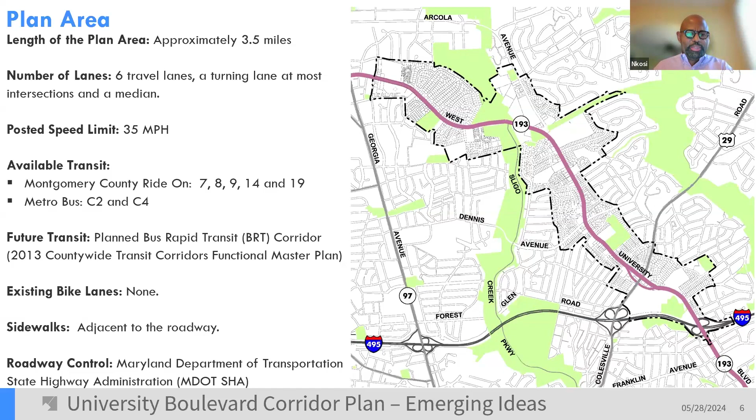A bit on demographics: we have roughly 3,400 residential units within the plan area, within the dark dotted lines running along University Boulevard, MD 193. It's a mix of residents within the plan area from an ethnic makeup perspective, and we have a variety of languages spoken, including Spanish and Chinese.

So as I noted, roughly 3,400 plus or minus units. We have a range of detached residential as well as townhouses built in the 1980s, early 90s, and some early 2000s. Most of the multifamily housing was built in the late 1960s, clustered at the intersection of Arcola and University Boulevard, including Arcola Towers, the Warwick, and University Towers, which are residential condos.

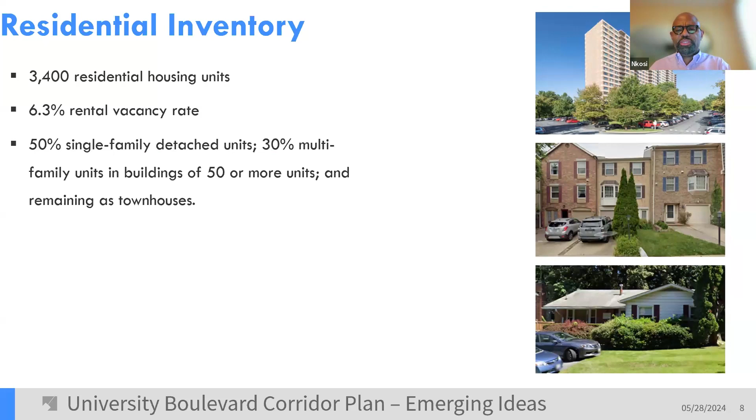Briefly on land use, existing uses. So just to orient you in terms of the colors you see on the screen, those in blue include public institutions or religious institutions.

We have Blair High School, at the intersection of 29 and University. We also have Northwood High within the plan area boundary. We have a variety of religious institutions: St. Bernadette near Blair, Good Shepherd along this portion of University, Luther Rice right across the street, and a few synagogues as well within the plan area. So we have a variety of public as well as religious institutions.

The red is primarily commercial businesses, located within the Four Corners area, as well as in the Kemp Mill shopping area, and along Amherst. We also have, as I noted earlier, multifamily at the intersection of Arcola and University.

The green is primarily parks or open space. We have Sligo Creek, a portion of that running through the plan area, as well as existing parks such as Wheaton Forest and North Four Corners local park shown in green. Everything else in the lighter yellow color is detached residential, or in some cases residential townhouses.

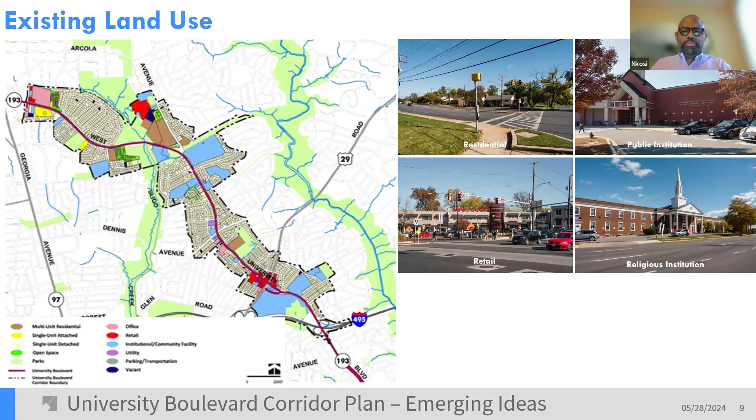Zoning is a key aspect to some of the work we'll be doing on this plan. Much of the area is within a residential zone, either R60, that's 6,000 square foot minimum lot size, or R90, which is 9,000 square foot.

In 2014, the county council did a comprehensive update of the county zoning ordinance and implemented new zoning categories within the Four Corners area. Those properties are now within a commercial residential town zone that permits both residential and non-residential uses.

Likewise, the neighborhood retail zone, shown here in red, is for Kemp Mill. And in blue, here are two planned development zones. Those are prior zones from the zoning ordinance that predated the council changes in 2014, an older zone category.

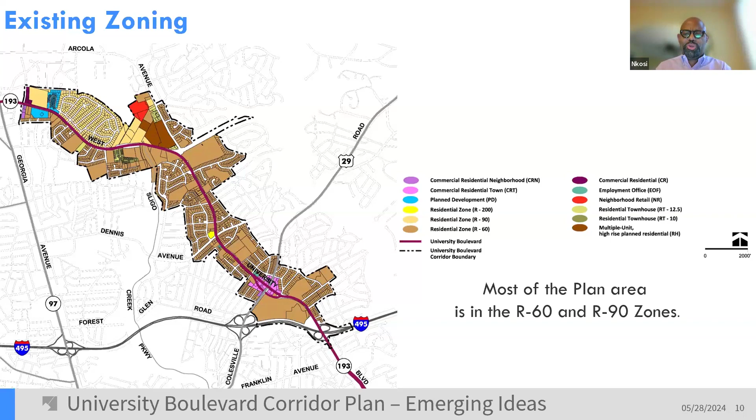As we move forward on this work for this plan, we'll be updating some of the planned development zones as well as the residential townhouse zones. Those are the two zoning categories that we cannot reestablish when we do a new plan. Next slide.

A bit of information regarding market conditions in the residential market. By and large, for a rental unit in this area, it's roughly $1,700. For sale, it's a little bit less than $600,000, which is comparative to other parts of Montgomery County. It's not as high as some areas such as North Bethesda or Silver Spring, but it's still relatively affordable.

Next slide. A brief note on some of the market analysis done as part of this planning effort, both internally and with additional consultant help that we received so far.

Much of the area is predominantly residential. We do have two distinct areas nearby, downtown Silver Spring and Wheaton, that sort of bookend both areas. There's a significant presence of institutional uses with a variety of religious institutions, followed by retail in terms of the amount of space. There's also some forecast potential for more residential development, which could bring a different sort of retail presence within the corridor plan area.

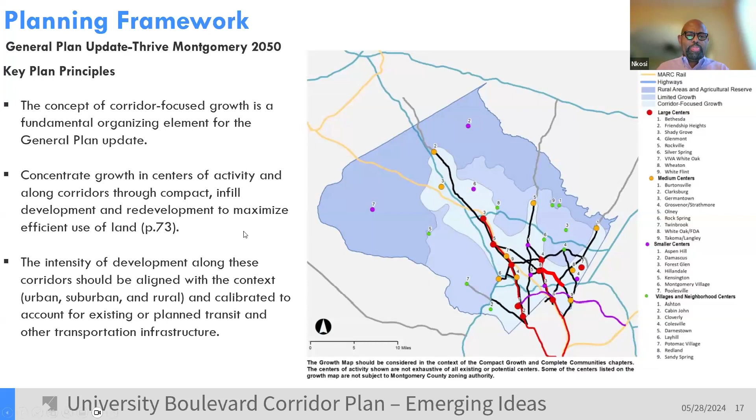In addition to the general plan, the council in 2021 requested the planning board to examine the attainable housing initiative. This came out of a zoning text amendment introduced by Council Member Jawando that proposed changes to single family zones, especially the R60 zone, and I believe the R90 as well, in terms of adding additional uses to those zones. Before acting, the council wanted more understanding of what's in some cases called missing middle—different unit types besides townhouse or multifamily. These are older typologies of residential development that we haven't seen in multiple decades in Montgomery County or other parts of this region.

And those are like duplexes, triplexes, sort of smaller apartment buildings. So my colleague Lisa Govoni and others have been working with the planning board.

They've had multiple work sessions, and they will be sending out their recommendations to the council probably later this summer regarding this initiative. This will have a countywide focus, not only for University Boulevard, but all parts of Montgomery County, depending on what decisions at the end of the day the council makes on the attainable housing initiative.

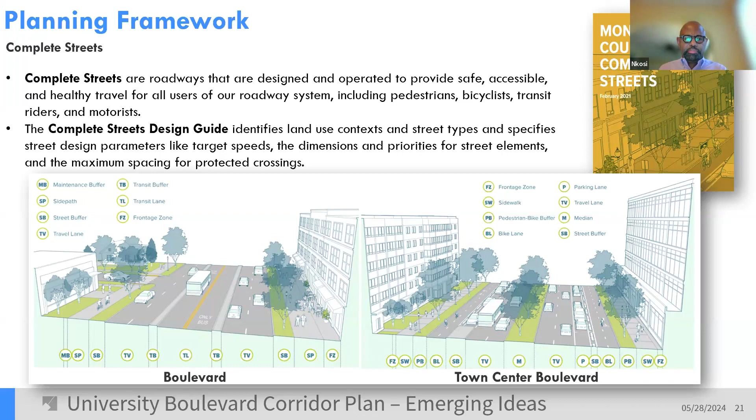As I mentioned earlier, the countywide transit corridors functional plan dates back a little while from 2013, but it provides 10 distinct bus rapid transit corridors countywide. What's shown here is University Boulevard between Takoma-Langley Transit Center to Wheaton. The area in red is calling for dedicated space for bus rapid transit, as well as the area at Four Corners in yellow, considering mixed traffic. So there's a lot going on in Four Corners.

It also identified a variety of BRT stops—these little circles here. You have Amherst, Inwood, or Arcola, some of the stops that are called for in the transit corridors plan. As part of this effort, we're examining those recommendations, and they will be either adjusted or confirmed as part of our work on this corridor plan.

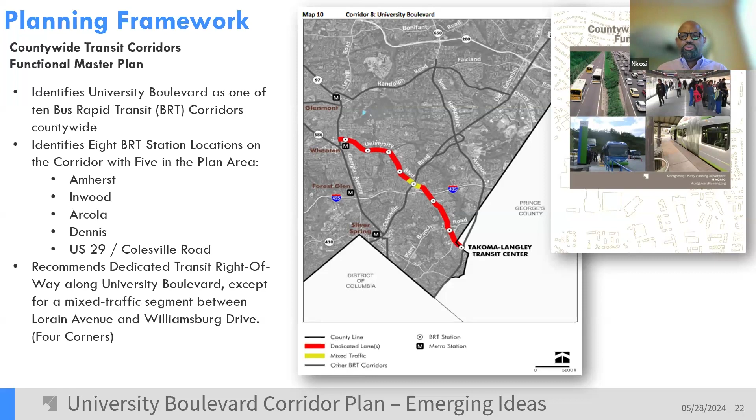Another bigger countywide functional plan, the Bicycle Master Plan, is looking at a variety of new typologies within all major streets, including University Boulevard, where it's recommending a side path as well as a recommendation for a breezeway—a higher quality biking infrastructure.

But as part of this planning effort for University Boulevard that we're undertaking, we're going to be re-examining this recommendation coming out from the Bicycle Master Plan, and we'll be making potential adjustments to it regarding the limitations on the right of way that we are working within.

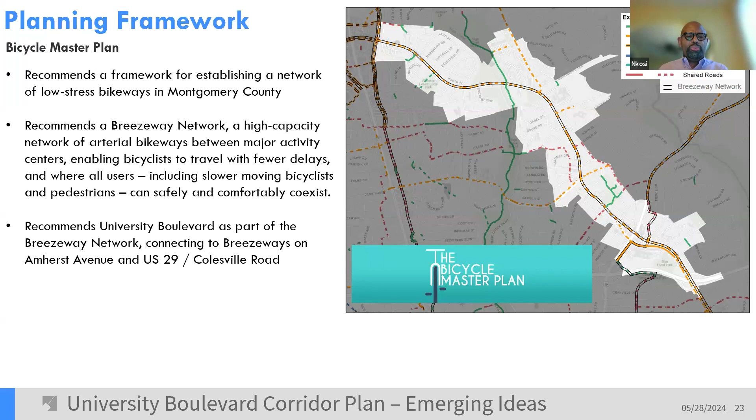Okay, so this is part of the presentation where I'll do a pause for any framework Q&A questions. Zubin, I will knock on your door to see if you have any questions coming in as they pertain to some of the overarching framework plans, etc. That is part of the presentation.

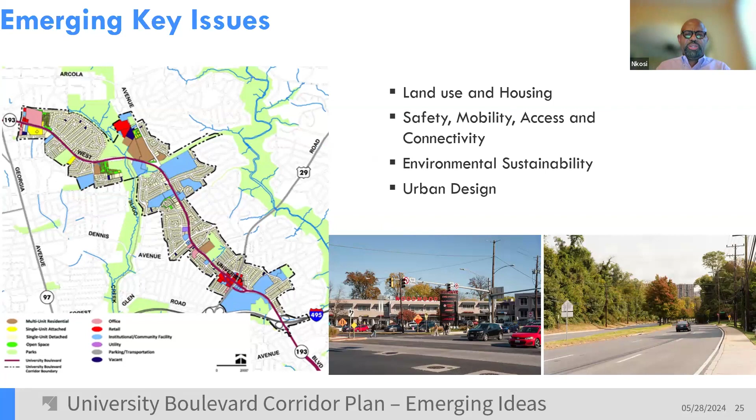So what's in front of you on the screen is a plan concept. A plan concept is one of the sort of initial tools we create once we start thinking about an area and how things could be in the future.

So briefly to walk you through what's shown on the screen, the dark circles are the BRT stops coming out from the functional plan, Amherst, Inwood, etc. Those shown in red are primarily potential mixed-use areas: Four Corners, Kemp Mill Shopping Center, the area around WTOP, as well as Amherst.

We also highlighted the Housing Opportunities Commission, or HOC. They own three properties within the plan area, including Arcola Towers, and they also own Permanda Court, which is right next door to Wheaton Forest Local Park.

And we also highlighted some of the churches here, such as St. Bernadette, that's located right here, as well as Northwood Presbyterian. And then in blue are some of the existing multifamily developments that are clustered at Arcola.

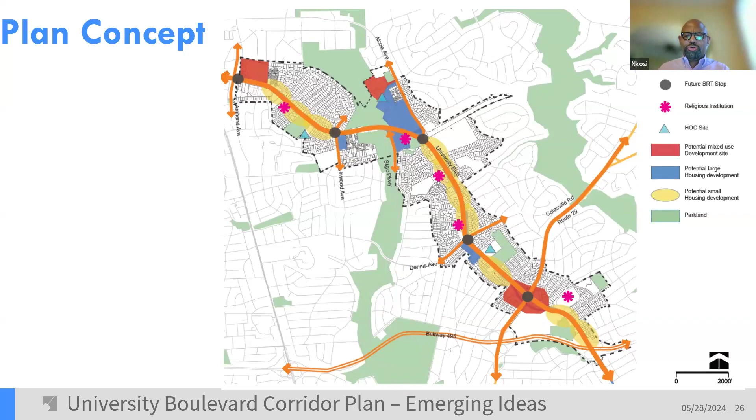And then along University Boulevard, we've highlighted in yellow potential new housing typologies. That's something we're going to be digging into more as we continue to work on this plan. And then obviously green are the existing parks or parkland such as Sligo Creek. Next slide.

This gives some more words and context to what I've just noted in terms of promoting more mixed uses from existing single-use commercial centers at 29 and University, Arcola regarding Kemp Mill, as well as in the WTOP Amherst area, thinking about the BRT stops and what opportunities there are in terms of potential changes over time.

Promoting new infill development at some of the religious institutional properties, building off that zoning text amendment approved by the council, thinking of different ways that potential changes could occur.

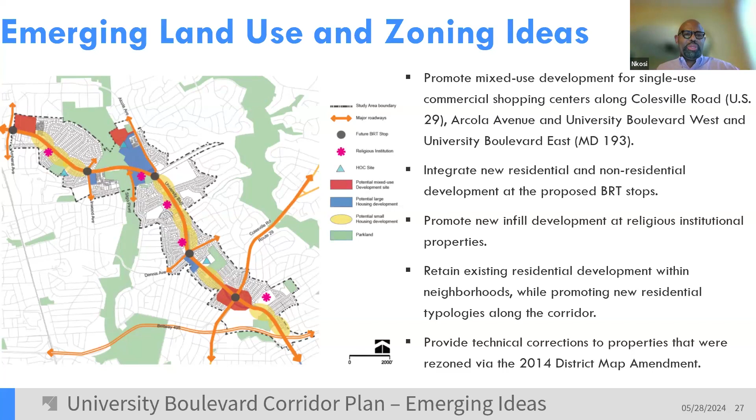We have an example showing you what we mean by infill development, and then retaining residential while promoting new potential typologies along the corridor, and then making some technical corrections based on the work from the district map amendment from 2014. Those are primarily properties where we cannot reestablish the existing zones again. Next slide.

Urban design is a key aspect that links both land use and placemaking together. Today, most of the plans we've done, prior approvals from the 80s, early 90s, or even from 2001, like the Kemp Mill plan, did not really address urban design. But in terms of that final experience we all would see once a property redevelops, from the architecture, to walking around safely, to the creative aspect of design or creative features, those are some of the things that really would be integrated regarding urban design.

So as we move forward on the plan development, plan recommendations later this summer, you'll have an urban design section with additional details and recommendations to build upon the land use and zoning recommendations, as well as highlighting some creative things that could fall within the placemaking category, where over time you could have new design, unique features that enhance the community even more. Next slide.

Some of the emerging land use and zoning ideas include promoting mixed use development, and that's primarily in the Four Corners area.

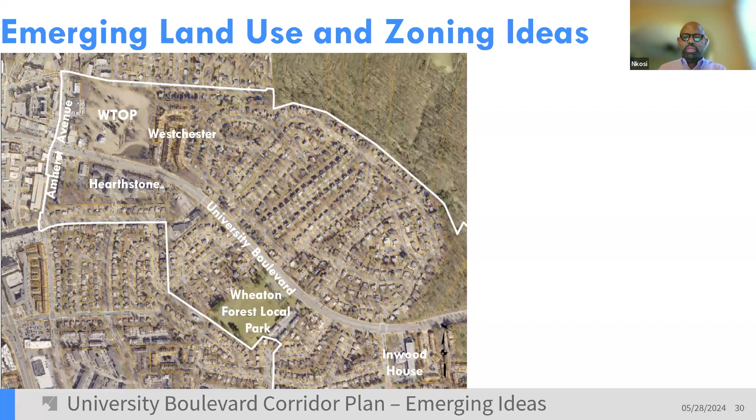This begins to show a conceptual urban design framework of what could potentially happen on the WTOP site. We know from conversations with WTOP that they don't have any current plans to do anything, but we're thinking long term, 15 years, 10 years from today - if those towers are no longer in use, what could potentially happen there?

On this site, seen in red, there are some new potential roadway connections, getting you more porosity within the property. There is the historic resource, the existing white building that's within the county's master plan for historic resources - that's untouchable. That's more than an acre of area set aside because it's historically designated.

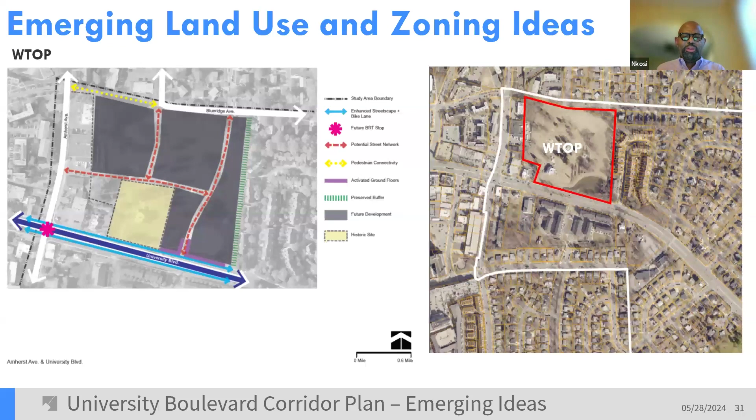But then the gray area is showing where the potential development could occur. We're also thinking of having some amount of open space on this property, such as a neighborhood green or some other public type amenity that would be consequential if this property eventually redevelops into the future. Next slide.

This is an approved preliminary plan. Approved preliminary plans are one of the development review functions that we have as a department. It's one of the earlier stages of review that the board would act upon once this plan is submitted and goes through the review process.

This is Har Tzeon Agudath Achim synagogue right near Reedie, not too far from WTOP. A couple years ago, in '22, they received a preliminary plan approval for a 90-unit senior building, shown on the lower right portion of this slide, as well as a 22,000 square foot synagogue.

This is an example of an infill, meaning we have development that surrounds it today. But you have one use, a synagogue today, that could potentially get redeveloped, and you add in additional uses. In this case, it will be the senior building, and then the synagogue will be the lower portion.

So this is the preliminary plan that shows lot one would be the senior building, and the second lot would be the synagogue. This is an example of what we think could happen over time for other religious properties along the corridor, in terms of adding more infill, either residential or repositioning their properties.

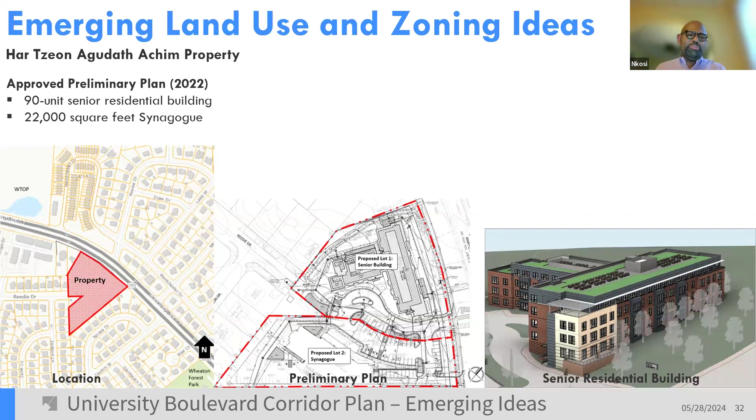Likewise, on the south portion of University Boulevard, this is the Northwood Presbyterian Church property. We've been in conversations with them - that property is up for sale, and we know they're thinking of different alternatives besides the religious use that's there today. And on the next slide,

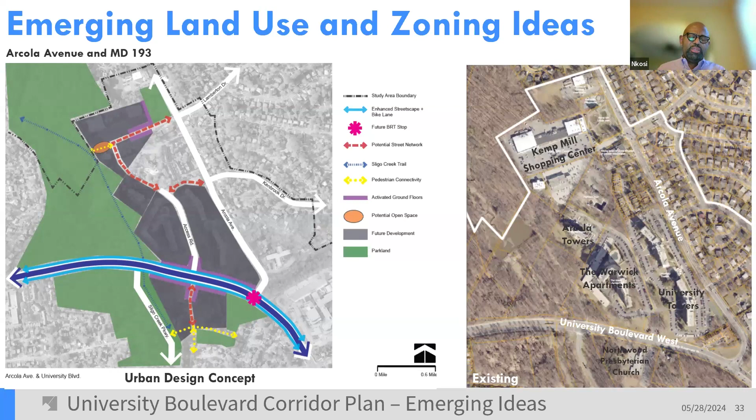you will see a more focused concept regarding Northwood Presbyterian. The area in gray is the big bubble that says future development. We don't know what can go there, but potentially it could be either multifamily in that 4 to 5, 6-story range, townhouses, duplexes, small apartment buildings - those types of things we're thinking about.

You also see some potential connections. This area has some environmentally sensitive areas that you want to protect and retain. You're seeing existing trails coming out from the Breewood Neighborhood Park here that will begin to take you potentially to Sligo Creek. Today we have more of a people's choice path - maybe in the future that could get a bit more formalized. So those are some of the connections we're thinking about for Northwood Presbyterian.

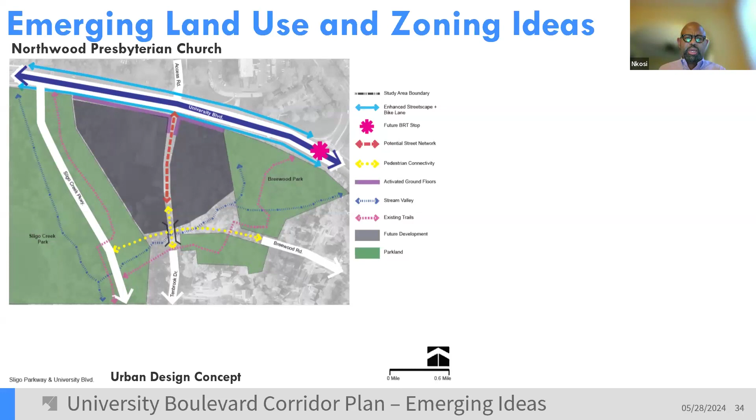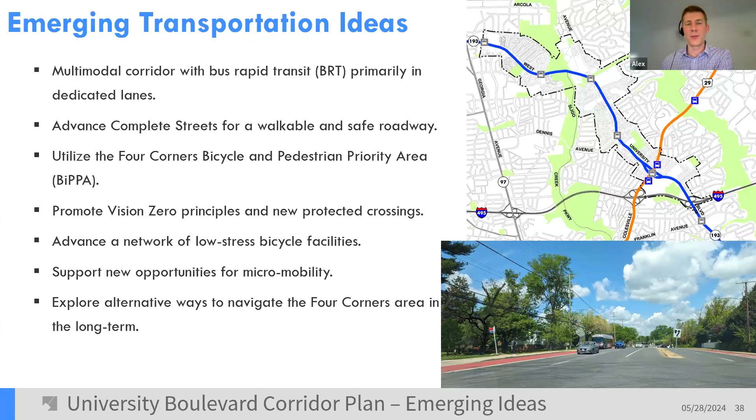We're also looking to advance a network of low-stress bicycle facilities. As Nkosi mentioned, this is part of the bicycle master plan for the county, and one of the big pieces of infrastructure is a breezeway side path proposed along the north side of the corridor. I'll show some other emerging ideas, acknowledging that right-of-way is tight in the corridor, and we're trying to keep that right-of-way to a minimum while still providing facilities for multiple modes. We're also looking to support micromobility, like e-scooters, on those facilities, and looking for alternative ways to navigate the Four Corners area in the longer term.

This is the emerging transportation idea we have for a general cross-section for University Boulevard. This would apply basically everywhere outside of Four Corners, acknowledging that the right-of-way varies along the corridor, but generally the current master planned right-of-way is somewhere between 124 feet and 150 feet. This illustration generally shows what we can accomplish in that narrower 124-foot right-of-way.

So thinking about the roadway today, there are 6 lanes of traffic and a median that also becomes the left turn lane at intersections. Not so different, while currently the pilot bus only lanes are in place along the curb, from what you see here between the curbs of the roadway. But some of the bigger changes we're proposing are outside of the curbs of the roadway.

Most importantly, the 8-foot planted street buffers provide protection from the adjacent traffic. That buffer makes it more comfortable for people to walk, bike, and roll along those side paths. And the side paths themselves, we're currently thinking of 10-foot side paths, one on each side of the roadway. As I mentioned, our guidance from the bicycle master plan is for a breezeway side path on the right side of the road in this image, which would be even wider, a 16-foot minimum side path. But given the right-of-way constraints, we're considering providing a shared side path on both sides of the street with a slightly narrower dimension to accommodate bicycle and pedestrian travel on both sides.

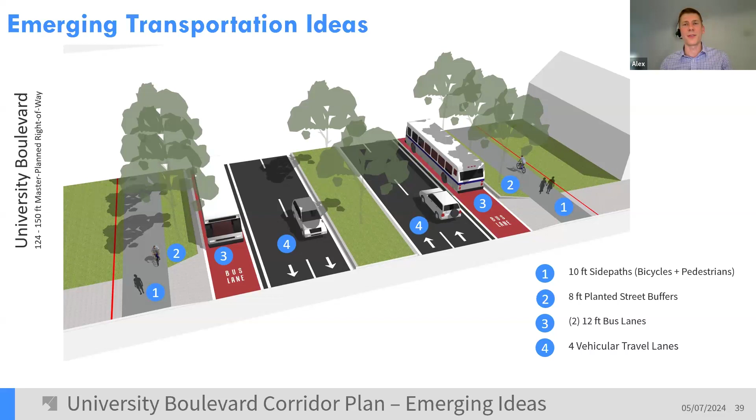I think we still need to put more thought into whether that would be a physically separated bus lane with some vertical separation. The right-of-way is narrow and our space is tight, so that buffer between the bus lane and the vehicular travel lane is narrower than the standards in the Complete Streets Design Guide, but we're hoping to work with our partners at MCDOT to come up with a solution for that.

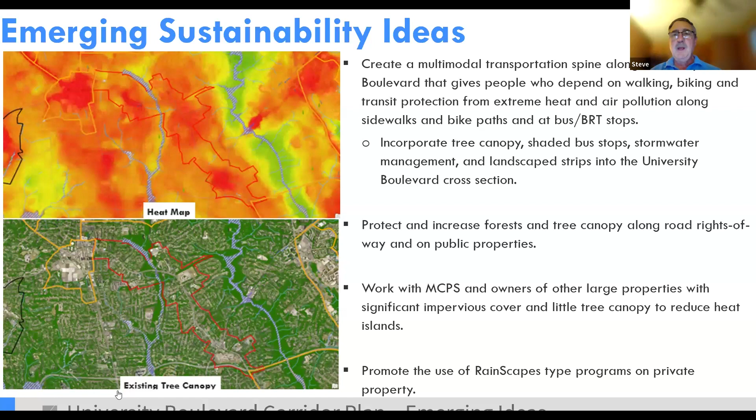While the recommendations that we deal with are specific to land use planning, and they can't get us to net zero on their own, they play a very critical role in helping the county achieve its climate goals.

We try to tailor all of this guidance to the specific development patterns and the existing conditions and characteristics of the area being master planned. In this case, this is the University Boulevard corridor, which has a significant transportation corridor as its central feature.

Knowing that, among other things, extreme heat events and intense precipitation are among the dominant impacts of climate change in Montgomery County, we've been using and developing some new tools to be able to analyze the issues and respond to the threats. I want to note the graphics that are on the left side of the screen.

The upper graphic is a heat map that was produced under a grant from NOAA and a county-wide effort. The readings were taken about a year and a half ago in August. There was a small army of volunteers that mounted temperature sensors on their cars, and they drove prescribed routes around the county three times during the day on a hot day in August.

That information was taken and applied to a geographic information system layer that's color-coded in a way that I think is a logical outcome that you might guess. The reddest spots are the hottest spots that were recorded as the vehicles drove around.

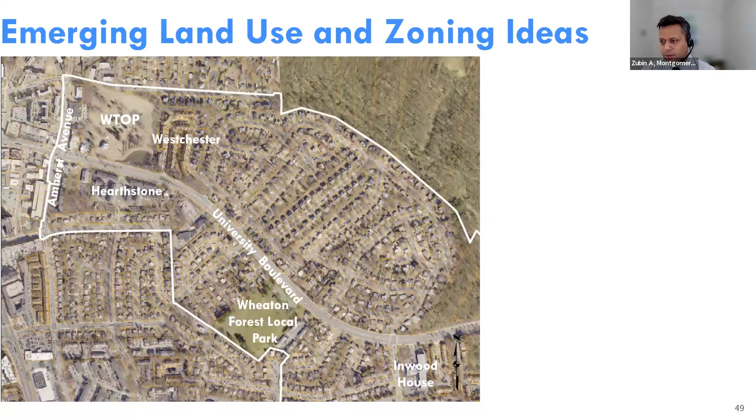But Alex, I have this first question for you, and I'm going to read it. It says: much of the new development in the county seems to lack focus on how traffic will exponentially increase for existing residents. Imposing new residences, walking, biking areas, and busways onto streets will, with critical retail coming much later if at all, choke traffic to simply buy groceries in Wheaton now. And I have felt unsafe at the Metro station for all of 20 years living here. These two issues seem completely absent from all the charrette presentations I have attended, which is all of them. I'd like to thank this resident for participating in all these meetings, but would love for you to address these concerns, Alex.

Thanks, Zubin. Starting with the question about the relationship between development in the county and vehicular traffic, that's definitely something we're taking into consideration as we make and evaluate our recommendations. As part of the master plan process, we have transportation adequacy metrics and perform travel forecasting on the land use and transportation network recommendations to evaluate their effects on a variety of things, including vehicular traffic, accessibility, and effects on the transit network.

So we'll have analysis of the existing condition and of a future year baseline condition that evaluates what would happen in 2045 if we don't move ahead with this plan, based on the existing master plan and all the zoning and infrastructure plans in place. Then, to evaluate the ideas in this plan, we'll also perform analysis to make an apples-to-apples comparison in the future. So that is something we'll think about.

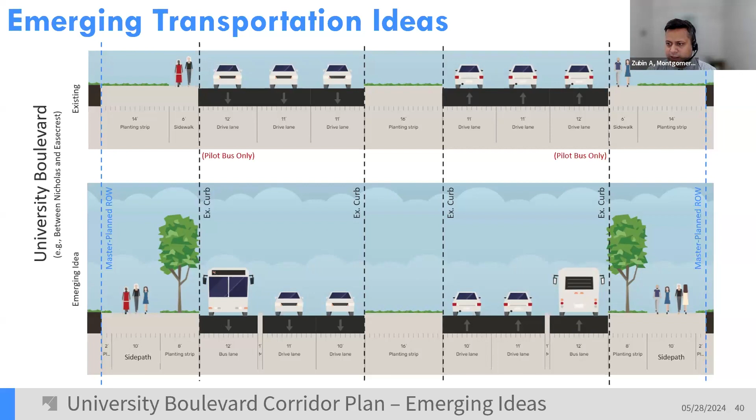Great, Alex, thanks for answering these questions. I'm sure we'll pull you back in, but I think the next question I'm going to send over to Lisa Govoni, our housing planner. The question is: will the current residents, homeowners and/or renters, be displaced by any of these plans?

Sure, that's a great question. I'll answer the homeowners piece first because it's a little easier. The Plan and Attainable Housing Strategies initiative, which Nkosi talked about earlier, would allow more diverse housing types like duplexes and triplexes in single family neighborhoods. That initiative may provide homeowners options should they elect to do so with their property, but there's nothing that would force a mechanism to make a homeowner sell their home. So that answers that question.

For renters, it's a bit more complicated. We talked a little about the older housing stock in the plan area, which may eventually come to the end of its useful life and require redevelopment. The Housing Opportunities Commission, a key property owner in this plan area and the county's quasi-governmental public housing authority, often redevelops their properties when necessary and increases the number of affordable housing units. That may be an option we're thinking about in our big ideas for this plan.

As the planning department, we would include language in our plan to mitigate as much as possible the effects of temporary relocation in the event of redevelopment. We would also include language requiring applicants to work with the Department of Housing and Community Affairs and us to plan for the right to return for these residents should redevelopment occur. We strive to include the strongest language possible in our plans to protect the rights of tenants and ensure they can come back after redevelopment. This is a really important key issue for us at the planning department that we've worked on refining in our past couple of master plans over recent years.